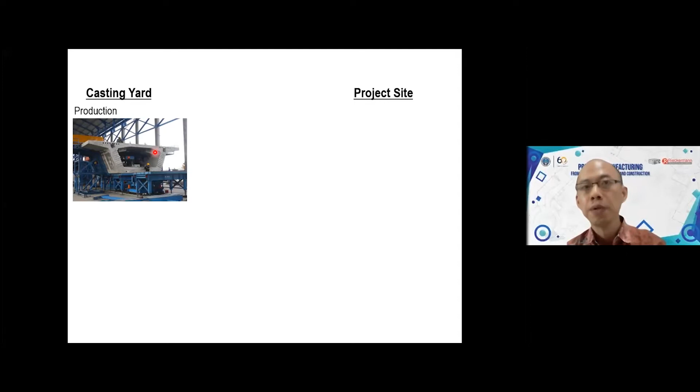So while on site, they are doing the foundation work, the substructure work, like piers, abutments, all these things, we can start doing the production of the segment. That's how we can speed up the whole process.

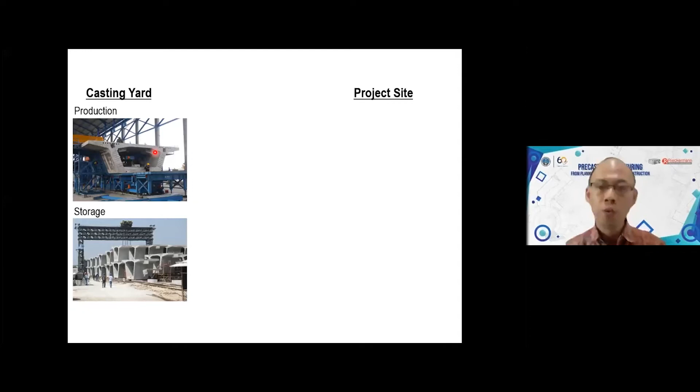If, for example, the site is not ready yet, in the casting yard itself we can do the storage while waiting for the sites to be ready—all the foundation or the piers, something like that. Once the sites are ready, we need to deliver the segment to the site. And then on site, basically, we do the erection, meaning we lift the segment and then do the installation on site.

So when we're talking about the construction work, we're doing something like this: from the office, when we do the design, then the casting yard, and then we deliver to the project site.

But when we are doing the planning, we must start from the project site backwards, meaning that to do proper planning—for example, as a design engineer or planning engineer—we have to really understand what is going on site, so that we can plan properly, because different installation methods, different erection methods, will make the design and planning completely different. That's why we have to really understand what is going on.

So the way I do my presentation now is that I will start from what's going on site, and then work backwards to the casting yard, because that's how we should plan our work. And in terms of site installation, or site construction method, there are a few methods that we can choose.

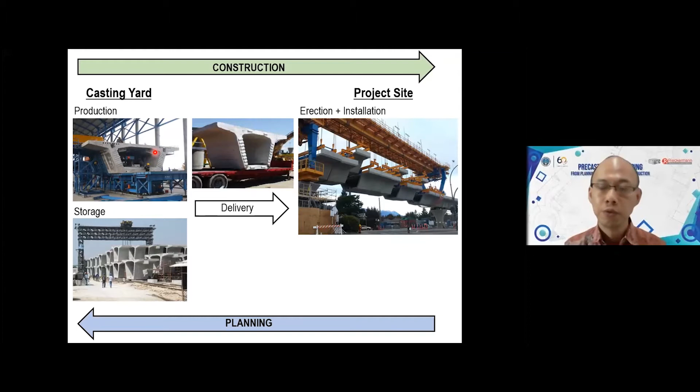Basically, these are some of the advantages, meaning why we prefer to do precast segmental: the casting we can perform at the casting yard, at the plant, compared to doing cast-in-situ on site, which is very difficult. If we are doing it in the casting yard, it will be better—we can perform our quality control much better. All the surfacing, finishing, texturing, sandblasting, painting, all these things, we can do at ground level. That's why we can control the quality better compared to doing it on site.

We save cost by reusing the precasting formwork, because instead of doing the full span, we do segmental construction. The segments can be precast during the substructure works, meaning these are overlapping activities, with relatively easier quality control prior to the placement of the superstructure.

Then assembly on site, the installation will be much faster. It's like playing with Lego - we put all these pieces, all these segments, erect them on site, and just join them together. It's much faster than if we had to do cast in situ, because we don't need time for curing before proceeding to the next span, since we're talking about horizontal structures.

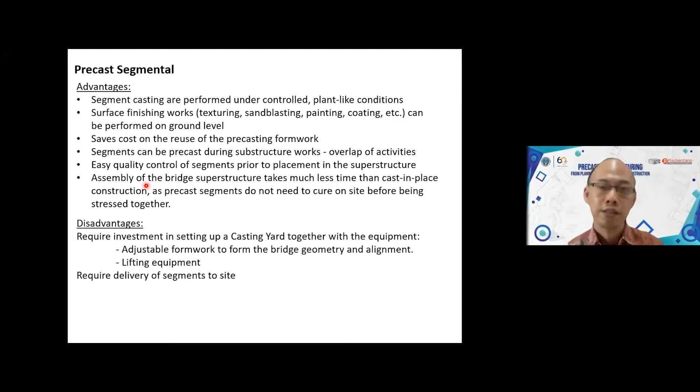The disadvantage is that we need a bit more investment in terms of the casting yard, where there are many equipments. Later I'll show what we have in the casting yard, like adjustable formwork and lifting equipment. We also have to deliver the segments from the casting yard to the site, which may not be possible in some areas. This is something we really need to plan properly.

In terms of the construction method, this is some of what I'm going to discuss today. Actually there are many methods using precast, but these are the 5 most common methods for precast beams. I will try to run through them one by one.

The first one is the full span precast beam. This is very common - basically we use a precast, pre-stressed beam, and then deliver it on site. We just put them one by one like this, and then do the cast in situ concrete slab. This is very common, but of course the length of the beam is very limited - we cannot do this for longer spans.

There are some variations. For example, the beam is precast and the slab is cast in situ, or we can also have a precast beam and the slab itself is prefab, also precast, and then we do some joints on site, something like this. It also can be done. The diaphragm can also be precast, or some can also be cast in situ.

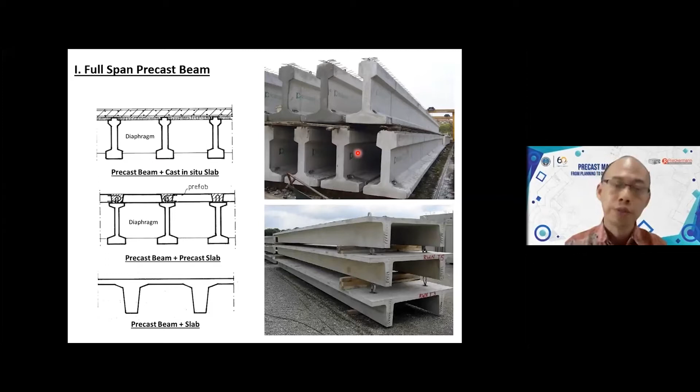This is something interesting happening in my hometown in Surabaya - we have this Suramadu Bridge. In one section, the causeway section, we have this precast beam girder. The weight is almost 80 tons, but the length is 40 meters. The problem is that the casting yard is somewhere here and the bridge is here, so it would be completely impossible for us to deliver this 40-meter long beam through the city area.

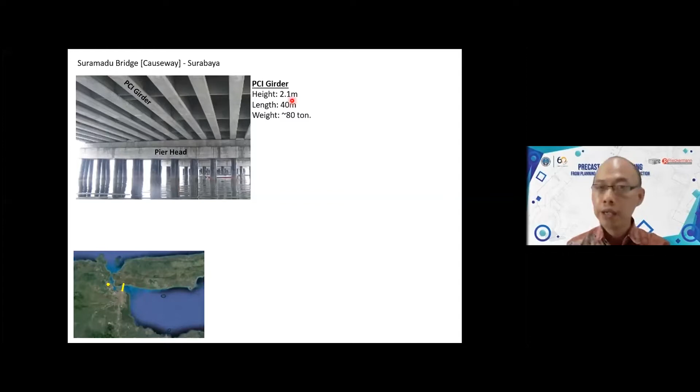It's definitely impossible, so this is why the planning is very, very critical. Because they cannot deliver this 40-meter length of beam, they cut the beams into segments - into 7 segments, each about 6 meters long. Then they delivered them from the casting yard to the site, so it became possible, and on site they're joined together using post-tensioning.

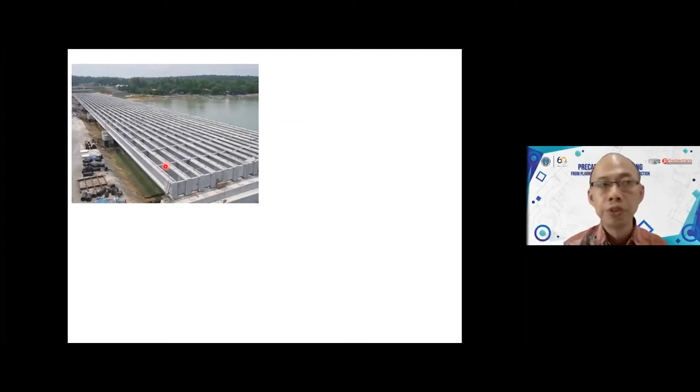After doing the post-tensioning, they lift the beams using a crane and install it. So this is how they do it - they cut into segments, then do it one by one, and put in the diaphragm, which is also precast. This is how they do the lifting. I'll show some of the video.

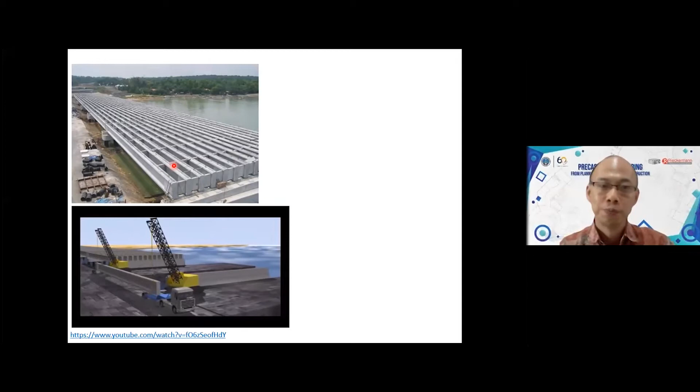This is one of the methods, because when doing precast we have to think about and plan how to erect and install it. One way we can do this is using 2 cranes, which have to move synchronously, doing it one by one like this.

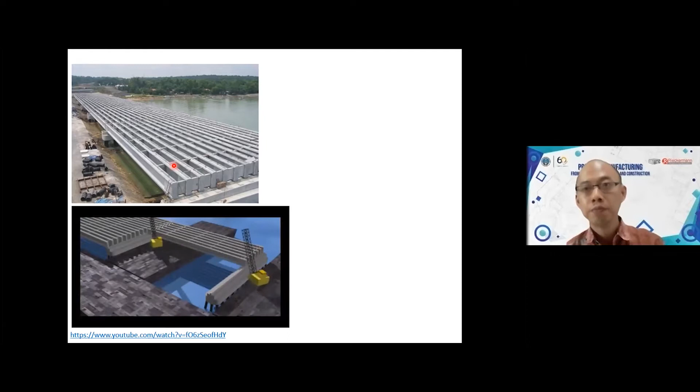Then the next for the next beam, and the diaphragm itself also. So this is the one near the land area, but for the one further away, this is how they do it.

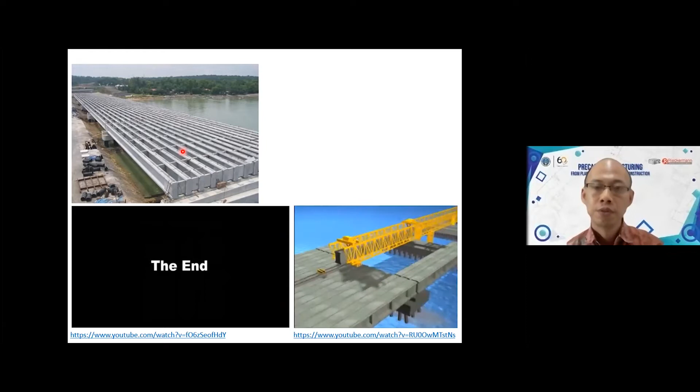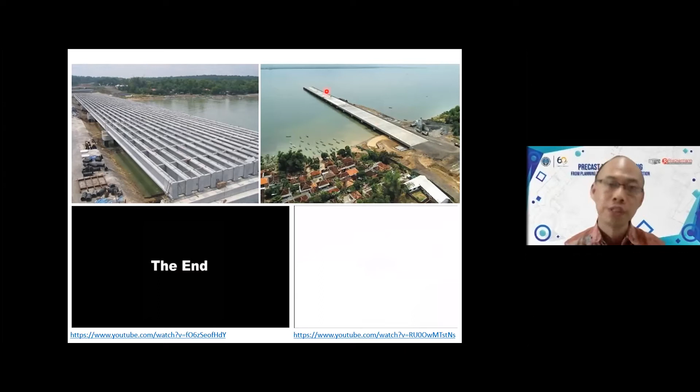So they just use rail, and then they slide it, and there is some frame structure to catch and put it in place. This is actually the fun part about precast - we have to find the most creative method to do the erection and the installation on site. Once everything is settled, they just do the complete cast in situ of the slab. So that's very straightforward.

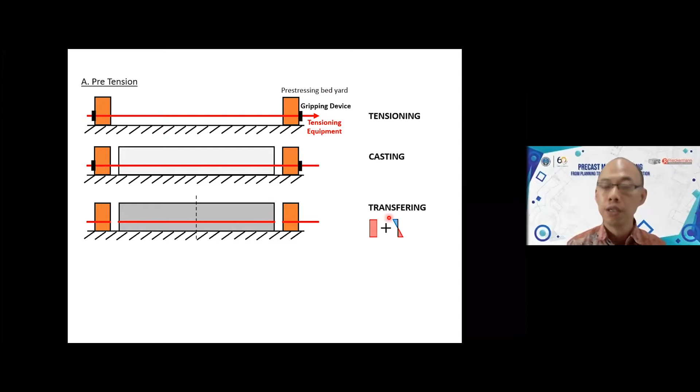For the beam itself, if we have to do the planning, we actually have 2 types. One is pre-tension, meaning we do the pre-stretching first, then the casting, and after that we do the transfer. Once we do the transfer, there is compression and then the counter bending moment - compression and tension, something like this.

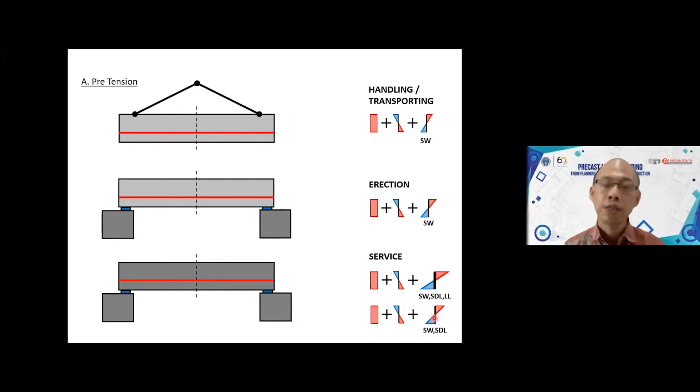When we do the handling or erection, we have to be careful of the additional self weight bending moment, depending on which point of the lifting. This is during the erection, and this is during service - meaning during daytime there is full live load, and during nighttime there is no live load, only the superimposed or permanent sustained load. So all these things we have to plan properly, meaning in all stages the stresses must be within the limit.

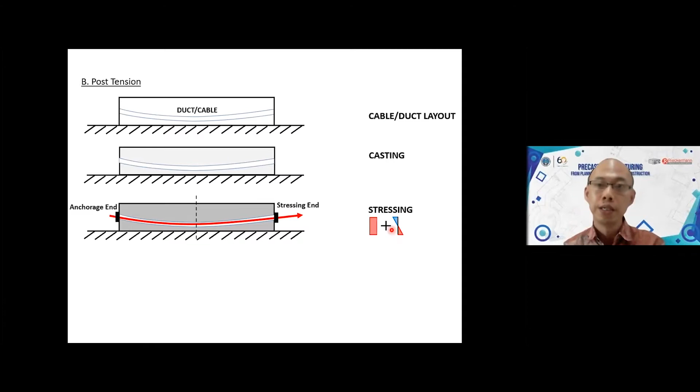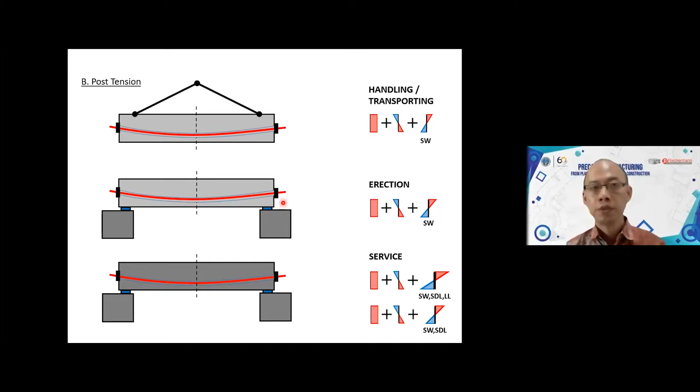Then we do the grouting. Again we do the lifting - depending on the lifting point, there will be additional stresses due to the self weight. Then during the erection, again the point might be different from the lifting point, the bearing location. And then during service, something like that. This is the typical post-tension beam - this is the rebar, then after they do the concreting, they do the stressing.

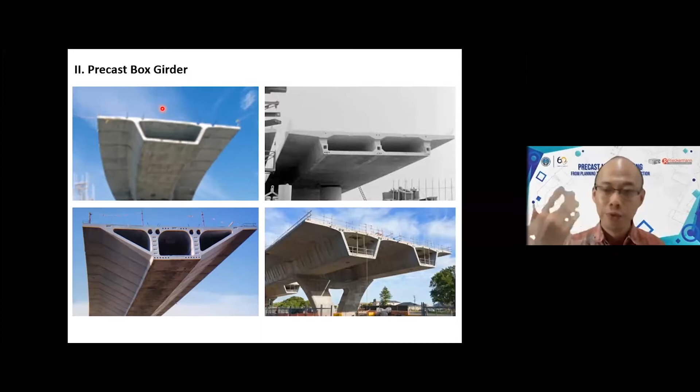So we do the beam and slab together, something like that, in one lift. But the thing is, for the precast box girder, if we are doing the full span, it will be very heavy because they have to lift everything together. That's why the span is very limited.

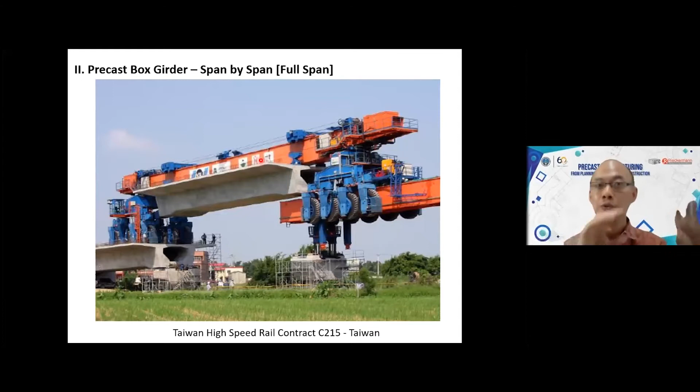This is happening in Jakarta just recently, I think last week. They are doing the full span box girder.

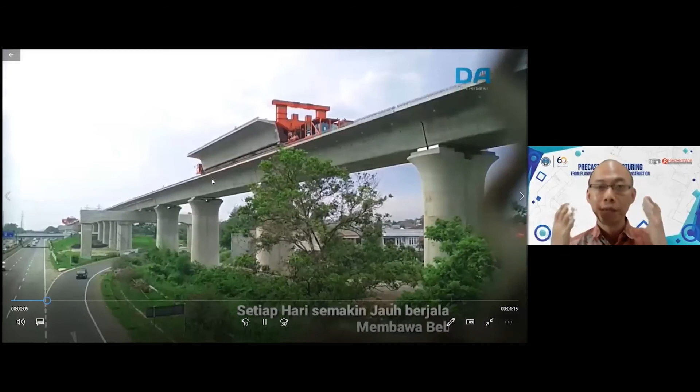So they're carrying, this is something we have to plan properly, how to carry all these things. So they have this transporter, and then this has the launcher here. And this launcher, this big giant equipment, must catch the segment and then slowly lower it down.

This happened just recently, I think last week. This is Jakarta Bandung, the new railway viaduct. And then they have to do the bearing pad here, for the proper installation, and then they're just lowering it down again.

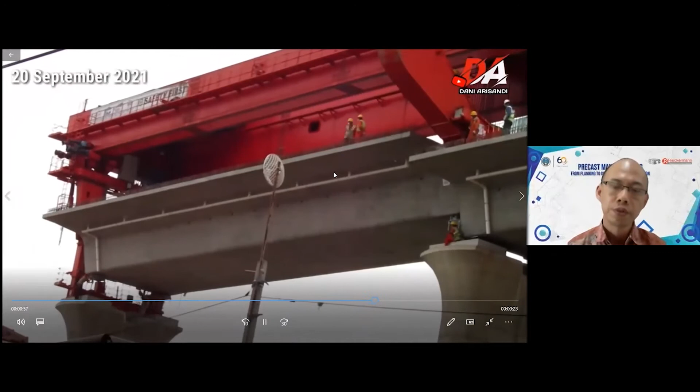It is very, very fast. But again, the investment is huge because they have to invest in the equipment. And then the casting yard must follow. The design also must follow if they choose to use this kind of construction method.

Some people, rather than doing this full span, think, okay, what if we can do it segment by segment so that it's easier to do on site? So they start to think about this segmental construction. And again, depending on site, one of the possible methods is using the false work.

If we can have the access, which is very luxurious in bridge construction, most of the time we do not have this luxury of having access down here. But if we can put the false work here, it will be good, so that we can put the false work, and then we can lift using crane and put the segments one by one, and then they join together.

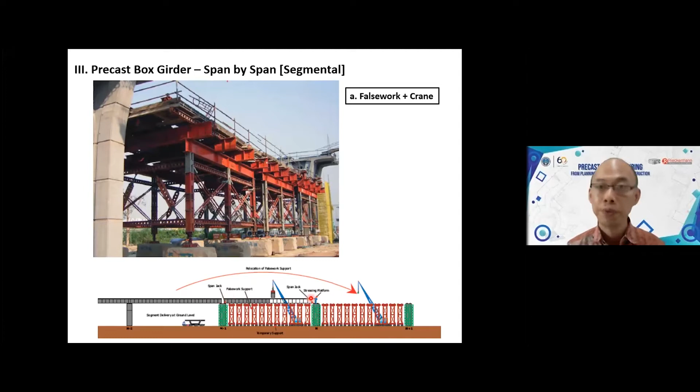Another method is that we can use this launching gantry. This happens if we cannot have access here, meaning we cannot install the false work. We can only send the segment, either delivered from the bottom or from the top. This is the launching gantry.

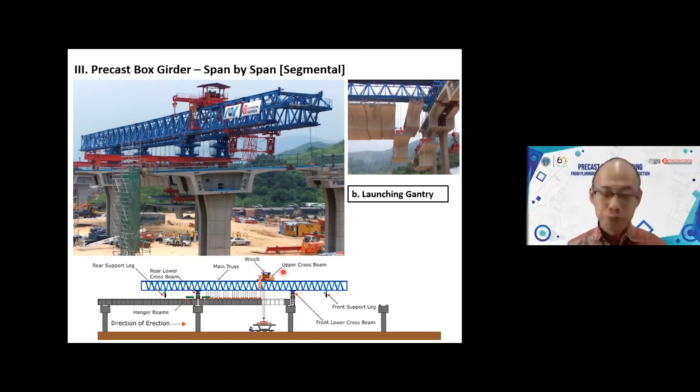This is very fast. This operation is very fast compared to if we do cast in situ. This is much faster. But again, the planning itself must be very precise because we are doing some precasting, and the schedule is very fast here.

So this is how it looks. They are lifting all the beams, all the segments, while people can still be moving around underneath, and then they will do the joining together one by one. Okay, this is how it looks.

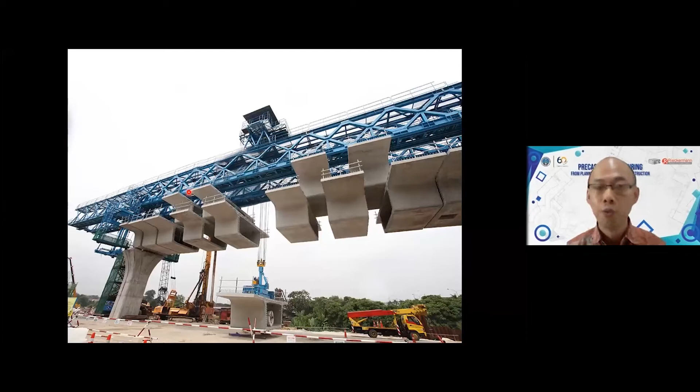And usually some of the segments will be lifted a little bit higher. That's a reason for that. I will show the reason why they do something like this. Okay, I will move to the next video.

Then they hang this segment to this tie bar. And by the way, this segment is about 30 or 40 tons. Yeah, it's very heavy. And they continue something like this.

This is one of the common practices, meaning they lift all together and then they join one by one. This is a very common method, although there are some variations that can be done.

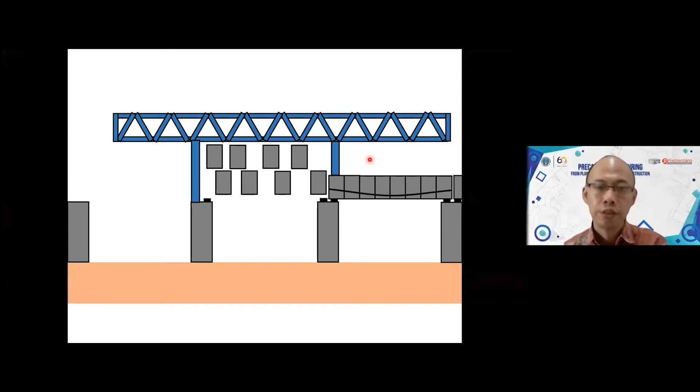Okay, this is some animation. I try to do the simulation. So all this segment is hanged on the launching gantry here. So what they are doing is actually lowering it down and then installing it here, they join, and then this one they also join. They're doing it one by one. Yeah, something like this.

The reason why they have to do it up and down is because if we are doing all of it at the same level, there is no space due to the installation.

So once they complete like this, they do the post tensioning, and because this is simply supported, it's easy - it's only the positive bending moment, and they can do the post tensioning. Definitely post tensioning, there is no way we do the pre-tension here.

Then they lower down and do the adjustment on the alignment, because some of the bridge may be straight, some may have a gradient, or if the bridge has a radius, there will be a slight crossfall, and they do the adjustment from the bearing, the alignment, something like this.

Another method that can be done is something like this. Show the video.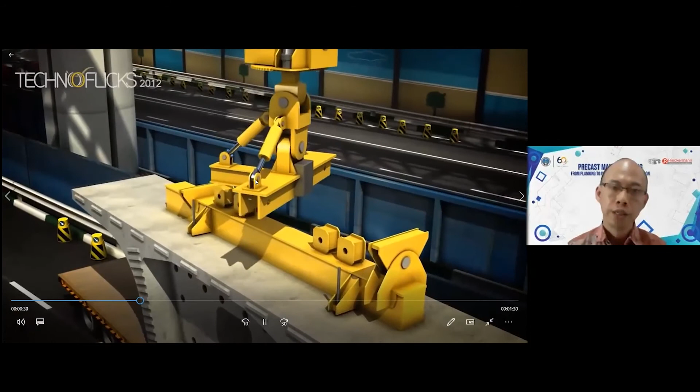So they catch this segment here, and then they lift, and then they hang it to the tie bar. Once they hang to the tie bar, this can be released to catch another segment.

Here they install one by one - they lift, they install, they lift, they install. It also can be done this way. Then this is the last segment.

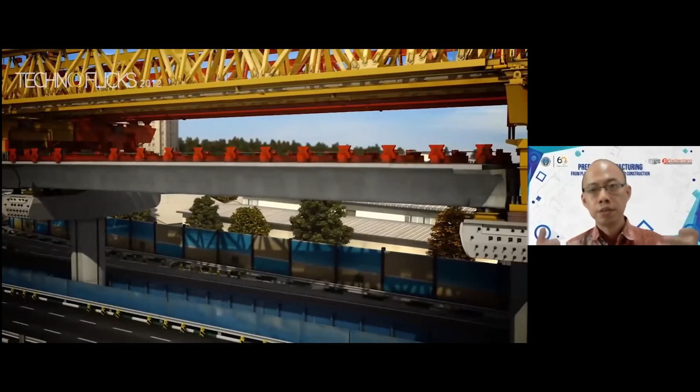Do the adjustment, the alignment. Then they do the post tensioning. So this is how the post tensioning looks like inside the box.

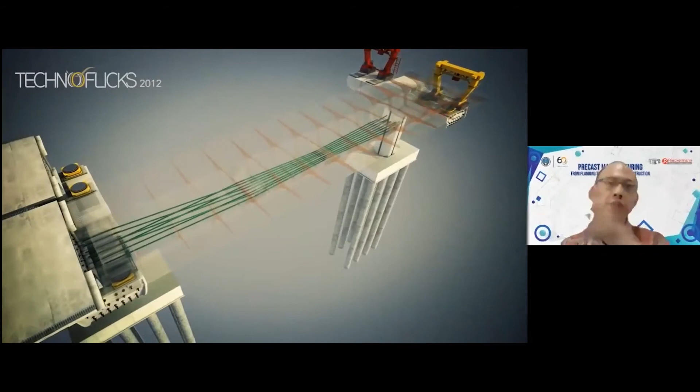And they do the jointing of the duct, the tendon. And then they move to the next segment, to the next span. No, sorry, stressing first.

Yeah, this is how they do the stressing. Yeah, that's the thing.

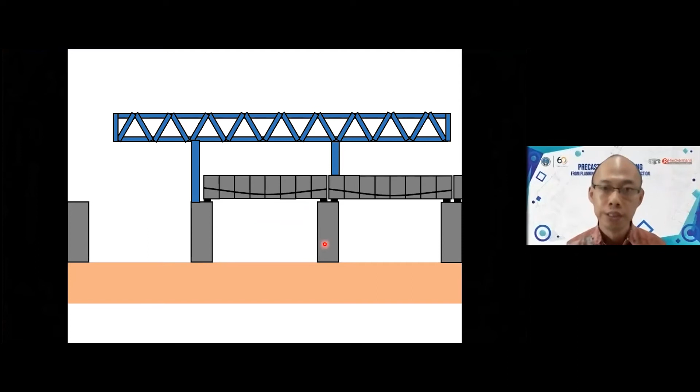Okay, now we're talking about the joining. How are we supposed to do the joining? Okay, in the casting yard, the tendon looks like this - because it's only a positive bending moment, definitely the tendon will be here, mostly at the bottom.

Okay, and they do this - this is so-called the shear key. So on side it will look something like this. I draw it a little bit exaggerated. So this is actually the shear key, and one side we call it the male shear key, and this is the female shear key - that's how site people call it. And it has to match perfectly.

Okay, what they are doing on site, first they are applying the grout. They're applying the grout, and then they join together. Hopefully it matches, hopefully it matches.

Yeah, imagine if you're doing something up already on the top, and then it doesn't match, it will be a disaster. So that's why the planning must be very, very perfect, very, very accurate.

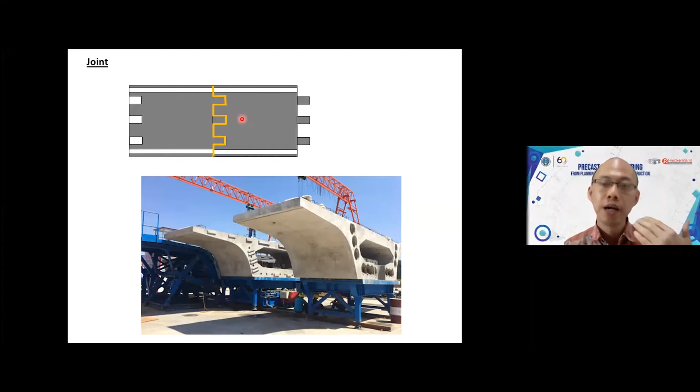So once they join like this, okay, they join so many segments, and then ultimately they are doing the post-tensioning. So once they do the post-tensioning, it applies a compression force so that it can be joined together. So the joint actually uses the shear key, the grout, and the post-tensioning.

There is actually no longitudinal rebar between the segments. So the rebar only stops between segments - there is no continuity in between the segments. The continuity only comes from the post-tensioning.

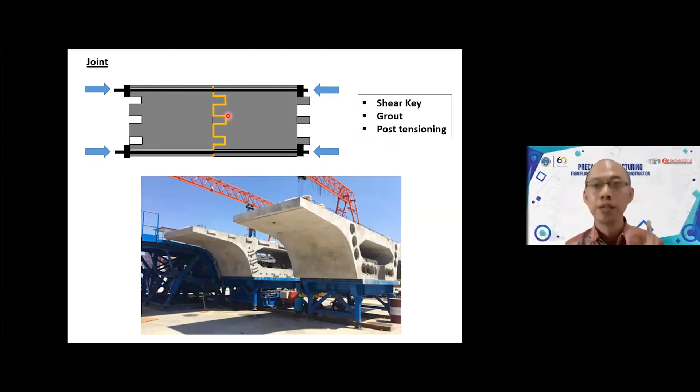So this is how they do it on site. And how do they make sure of 100% match is that they are using the so-called match cast. So this is how we do the planning - in the casting yard, they have to do this so-called match cast. So after they cast the first segment, they are using the first segment as a match, to match the other one, to match the next segment.

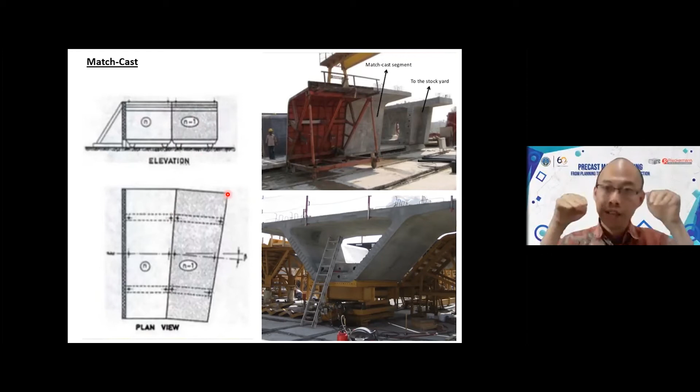So if we are doing match casting in the casting yard, on site it will be 100% match between the male and the female, something like that. Even if there is a radius, we can also do the match cast, something like that. Also, if there is a gradient, we can also do everything here in the casting yard.

And because we know that this will be lifted using a crane or using a launching gantry, in the casting yard they have to put the inserts so that on site they can catch and lift it. Imagine if there is nothing here, then there is no way on site they can lift it out. So everything must be planned properly depending on what is the situation on site.

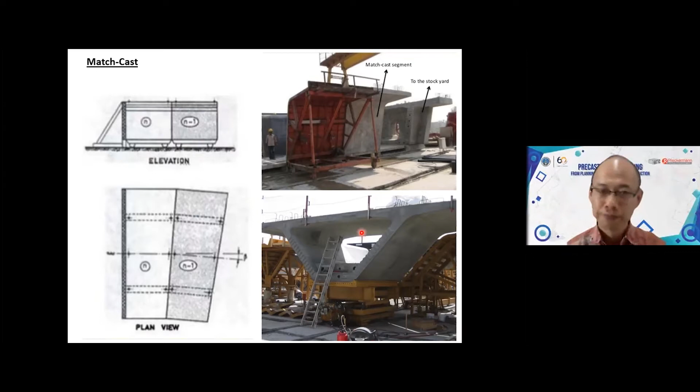Then we move backward to the casting yard and then move backward to the design when people do the design. So this is how the match cast thing works. I will show some video about what's happening in the casting yard and how they can do the match cast.

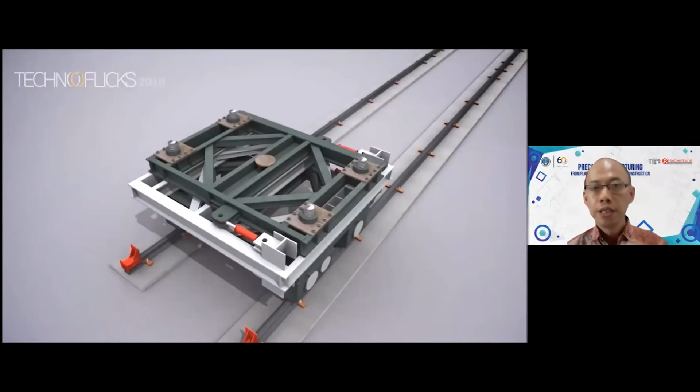So this is the adjustable formwork. It has to be very flexible because the type of the segments can be anything - the dimension, the thickness, and if there is a radius or whatsoever.

So this is the matching segment, and this is the formwork. It has to be flexible, meaning that it can do some adjustment. There is a hydraulic jack that can shift the angle of this thing. And this is for the end segment.

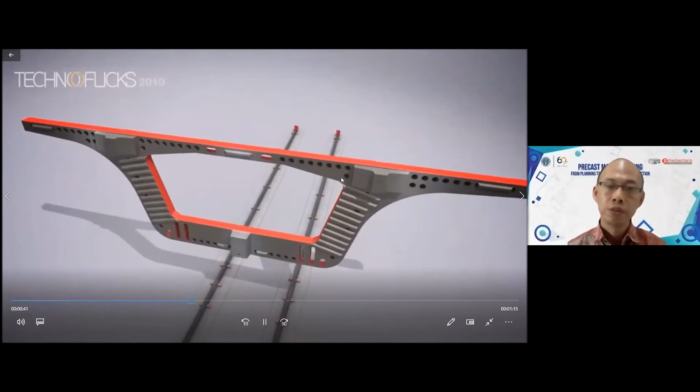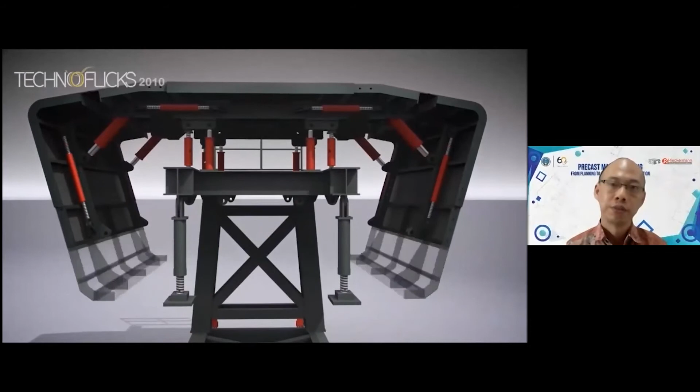And this is the inner form. So we have the outer form and we have the inner form, which again is adjustable. Again, this is also an investment.

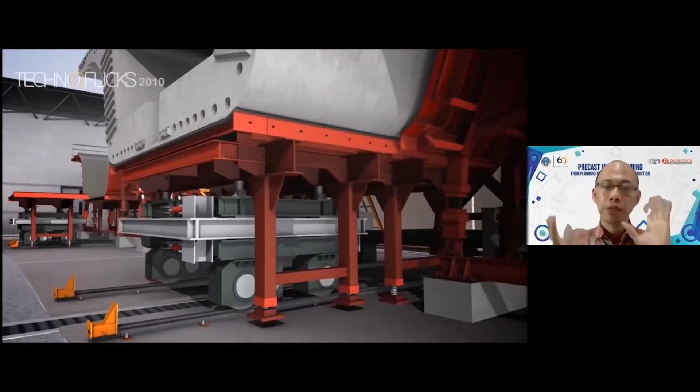So this is the match cast. They put the rebar and then they do the casting. They release the formwork - and this is how they release the formwork. Everything is done by hydraulic jacks. Then they lift, then they put it in storage, waiting for the site to be ready.

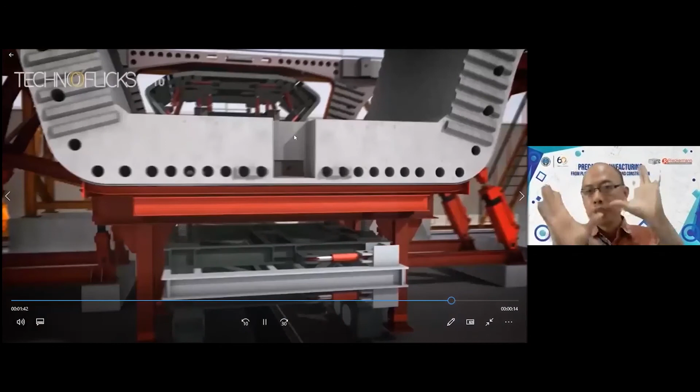See, there's a shear key, this thing. Okay, they do some adjustment in the alignment. Then the rebar cage just arrived. Make sure all the dimensions, the alignment of this thing, is correct. Then they can do the casting.

This is very important, especially the post-tensioning duct, because later on they will have to do the post-tensioning. So the duct itself must be matched. So this is how the casting yard looks like.

Okay, then I think I have one more video. So this is what's happening on site. So this is the inner form, and then this is the ducting for the post tensioning, and this is the match cast, the previous segment.

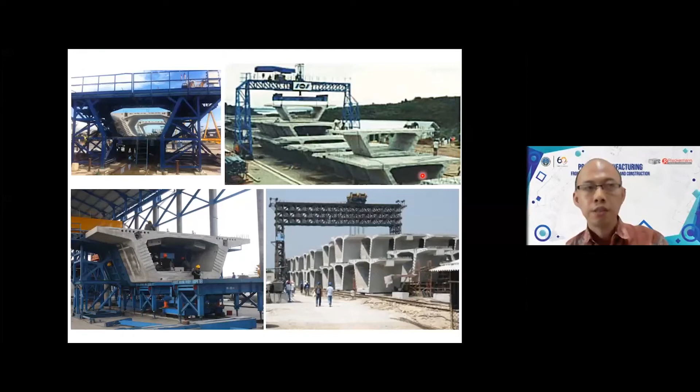And because this is a precast, anything wrong in the casting yard, it's very difficult to do rectification work on site. It's very difficult. That's why the planning itself must be very, very accurate.

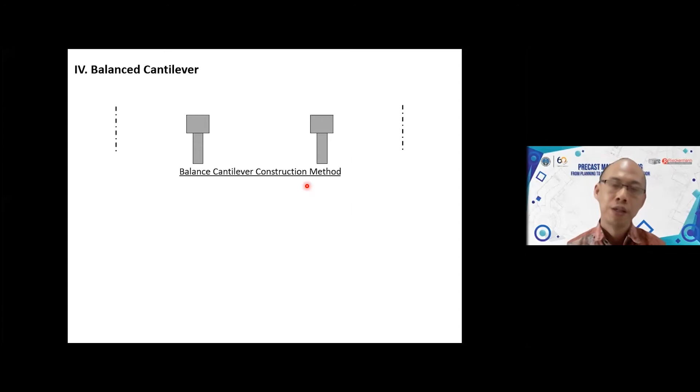Okay, another method is using the balance cantilever. Again, if we are talking about the construction sequence, definitely we start from the foundation, the pier, and then the pier head. So this is actually what we have on site. So if we want to do the segment, we have to start from here actually. That's why they invent this method called the balance cantilever.

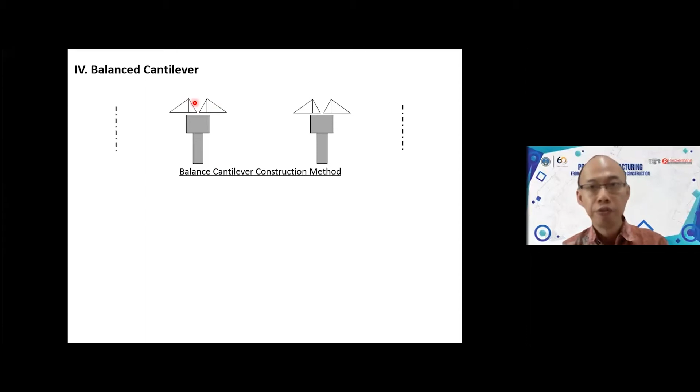What's happening is something like this. They put something here - it can be a lifting frame, it can be just a crane whatsoever. Meaning that they put the first segments here and then they join. What's happening here is that they will induce a bending moment, a negative bending moment.

And because there's a negative bending moment here, we put the post tensioning on the top fiber. Then this thing going out again. Install the next segment, the bending moment increases. Then we put another tendon on top to carry this bending moment, and so on. It keeps increasing.

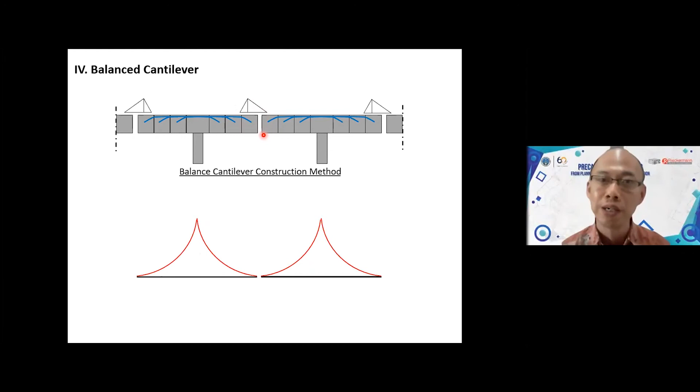And then at the end, definitely at the very last end, we have to do a cast in situ, the closure pour, because there is no way we can do all by precast. To match this perfectly by precast, there's no way. So the last segment will be a closure pour using the cast in situ.

Once it's joined, all the bending moment becomes different. Now it becomes a continuous structure. Then after this, all the live load comes, and it will increase the positive bending moment because all the live load later on will come. But during the construction, this is the critical point. That's why later on when we do the design, we have to be careful of this negative bending moment.

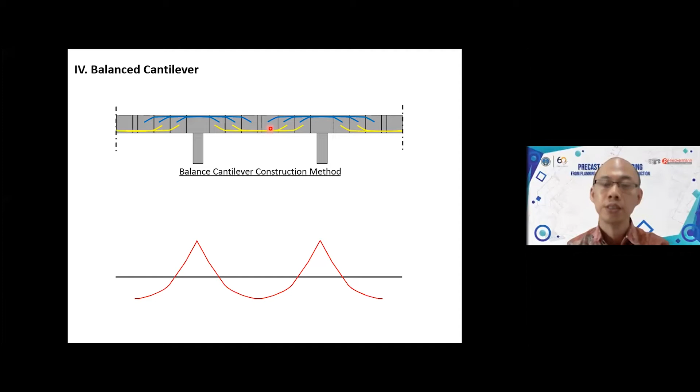Although once it's connected, it will be slightly less - that's why we need the continuity tendon at the bottom, something like this. So this is the cantilever tendon, and this is the continuity tendon. Cantilever tendon at the top to carry the cantilever weight, and this is to carry the live load at the final stage.

So this balance cantilever is actually building the bridge from both sides, and we have to balance - maximum only one segment difference, cannot be different so much, because the overturning bending moment will be huge at the pier and then transfer to the foundation. Advantage: no false work required.

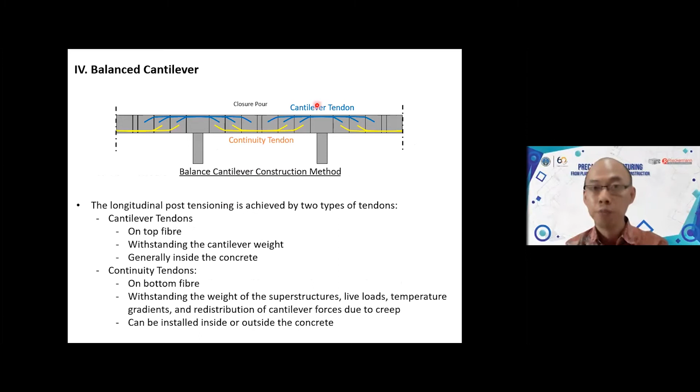These are the areas that are free because we are doing everything on the top, from the top. It's feasible when the terrain underneath us is inaccessible - traffic, rivers, even cliffs or high above the ground. Optimization of the formwork, improved, very flexible.

This is how we put it on site, and that's why we need to know the construction method. Because the tendon layout will be different. If we choose to have a balance cantilever, most of the tendon will be on the top. But if we are doing span by span, most of the tendon will be at the bottom because of positive bending moment, and this is because of the negative bending moment.

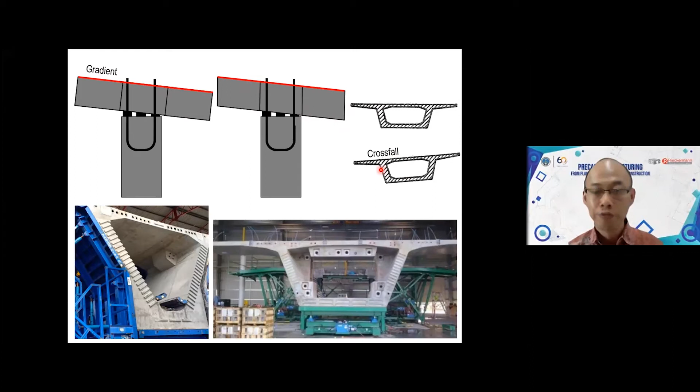Either way, we have to do proper planning. Both ways are possible and feasible, even if there is a gradient like this, or even if there is a crossfall. It can be done perfectly if we know what's going on site and if we know how to plan it properly.

This is to show some of the projects I've been involved in. Yeah, this is the one in Hong Kong.

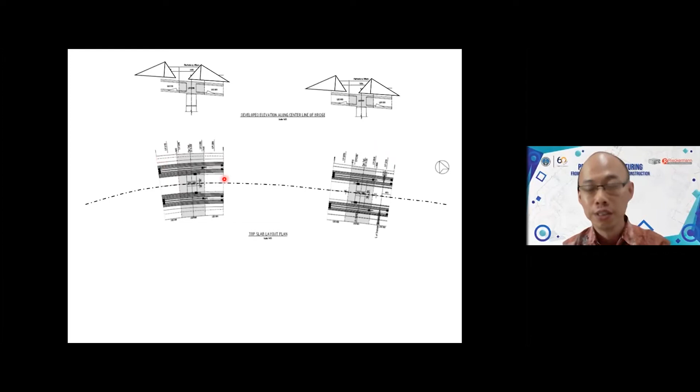This is just to show that we have to do the balance cantilever. We stress the top cantilever tendon and then we shift, something like this. So after we finish the top, then we do the closure pour. Then all the equipment is released back. Then we do the bottom tendon. This is what we were doing in Hong Kong the last time.

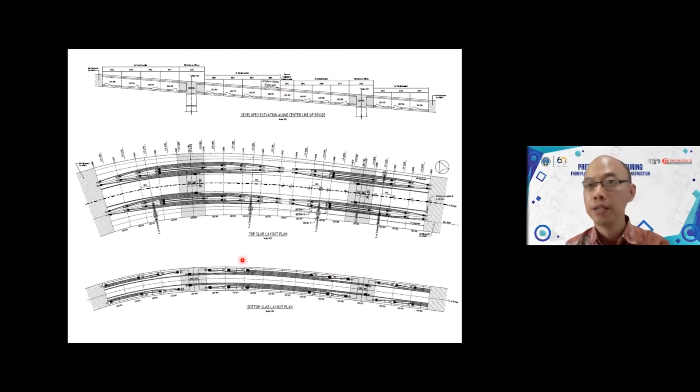This is also very important to be considered. For example, if we are doing it without camber, on site due to the cantilever and then due to the self weight, it will go down something like this. That's why when we do the planning, we have to aim slightly up so that on site it will be just nice. Everything can be done properly, everything can be calculated, and everything can be planned.

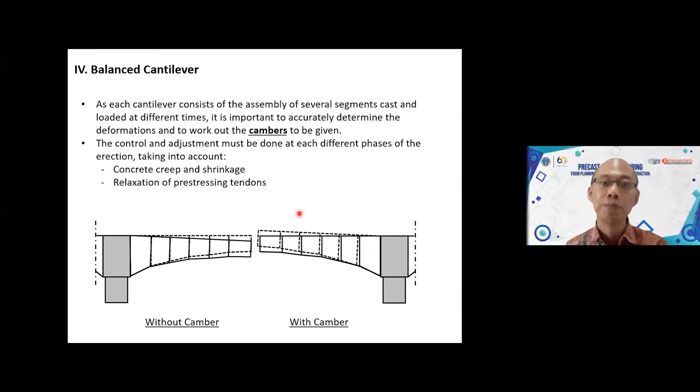Because if you're talking about a 200-meter span, for example, and then we go 4 meter, 4 meter, 4 meter, then there is a chance that we do not meet at the center, and it will be very dangerous. Although things can be done, we can do some rectification work, but it will be difficult. So pre-camber is very important, although if you are doing precast, it will not be as much compared to if we're doing cast in situ.

Because it's a balance cantilever, we can do the adjustment of the segment. If you notice, this is thicker and it gets smaller and smaller. This can be done using precast or using cast in situ, where we do not have any access from here. We are doing everything from the top.

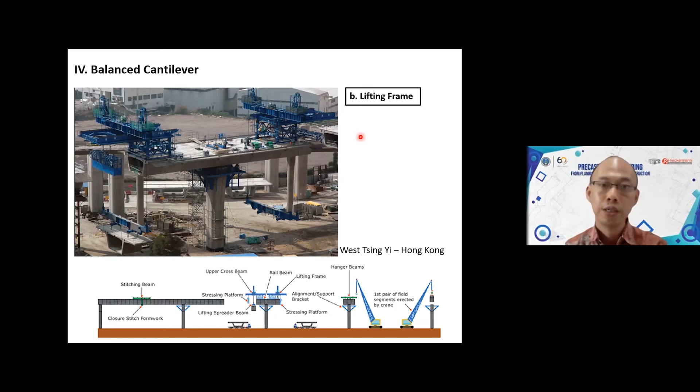It can be done using a crane, just lift using crane one by one. Very easy method, we can do the lifting frame. We need to put the lifting frame here, we lift, install, then this moves to the next segment. It can also be done using a launching gantry, yeah, we do the balance cantilever.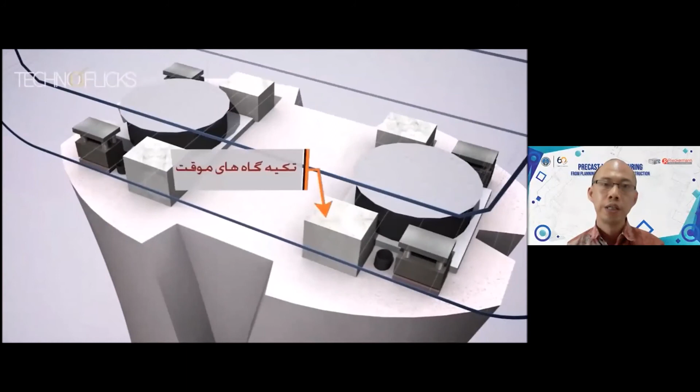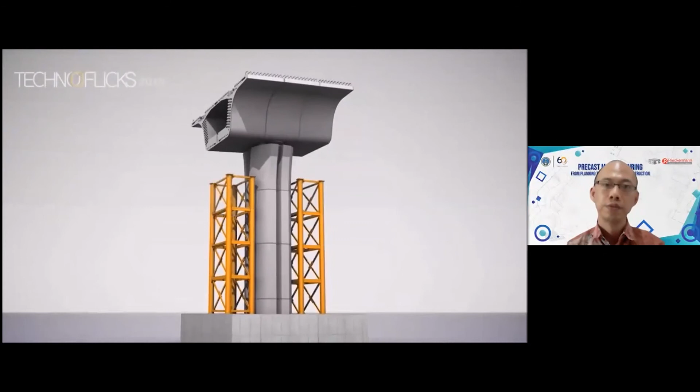This is the first segment. They put the temporary post tensioning, then they do the cantilever tendon and do the stressing. Then they move to the subsequent segments, and this is the very last segment. They do the adjustment, hopefully it matches. Then they do cast in situ only for the last segment to join it together. After that, they do the bottom post tensioning, something like that. So that's how we do the balance cantilever thing.

Another method, which is also very creative in my opinion, is this incremental launching. They're doing the casting on site, but I cannot say this is cast in situ because they're doing the casting yard here, and then after they finish, they just launch the whole thing. Then they cast the next segment here, pull it together again, and cast the next segment again, one by one, something like this. So this is the casting yard, and this is the site, and the delivery method is by pulling it together.

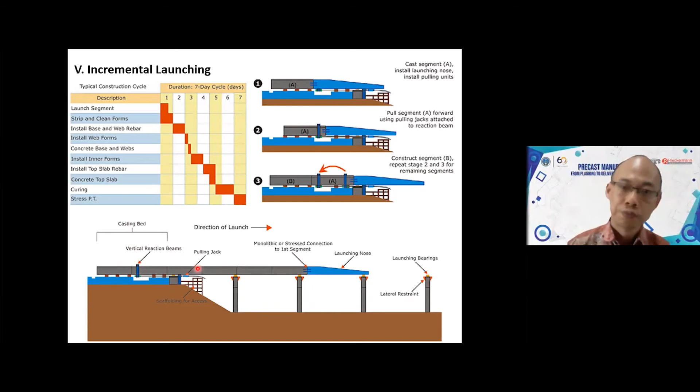So I can still say that this is precast. The casting yard is here, so that they just pull it together, something like this. So the casting yard is here, and when everything's ready, they just launch it, something like this.

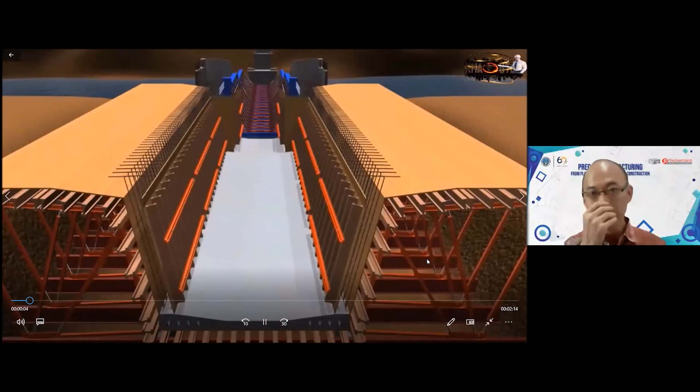I have one last video. I know my time is almost running out. This is a 2-minute video. This is the casting yard at the end of the bridge, also on site actually. So they put the rebar, they put all the tendon, all this thing.

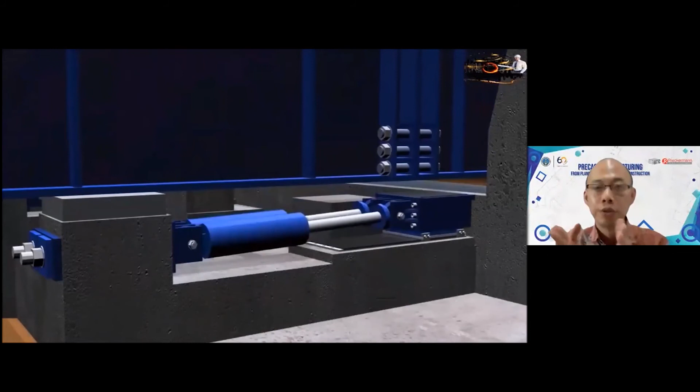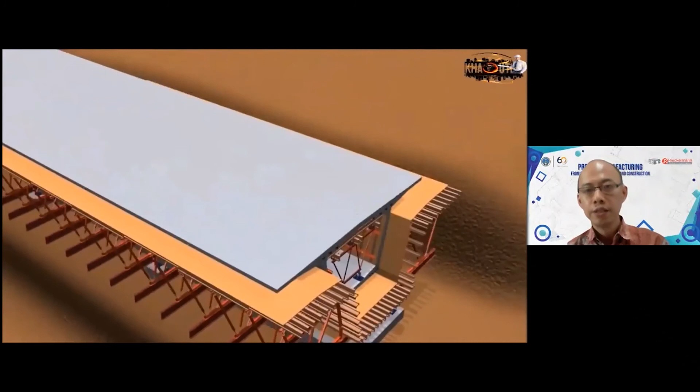And then there is some mechanism, again, using a hydraulic jack to pull this. This is how they pull the segment forward. And then they continue casting the next segment. And they keep on pulling until the end. And this is how they do it.

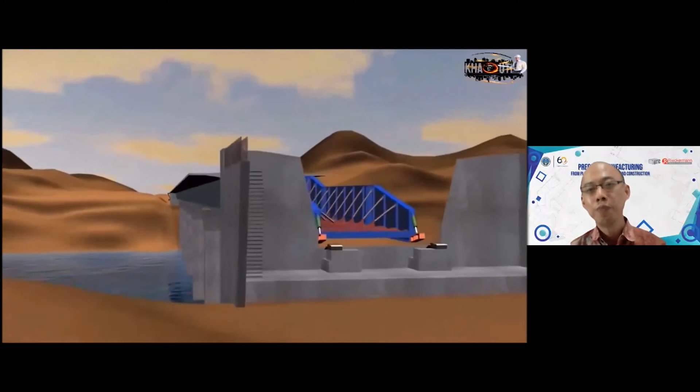They put some Teflon so that there's to minimize the friction, something like that. It's all done by hydraulic jack, all this thing, just to speed up all the process. It looks easy in the video, but on site it will be very, very tough and must be very, very precise.

In terms of the geometric control of this thing, once it reaches the site, then they do the final adjustment on the alignment, and then they put the bearing, because at this moment they are still sitting on the hydraulic jack. Then after they put the bearing, the work is finished, and they clear up all the casting yard.

And this is if we want to do the planning, the design, how we are designing the tendon, during the construction. Again, we have to know what's going on site. This one, I think I just skip. This is some of the project I've been involved, but I just skip it.

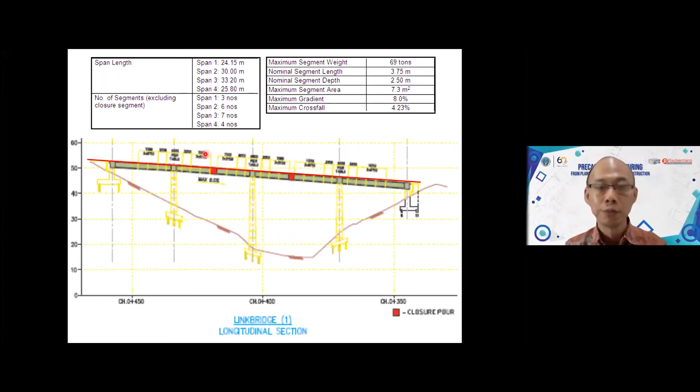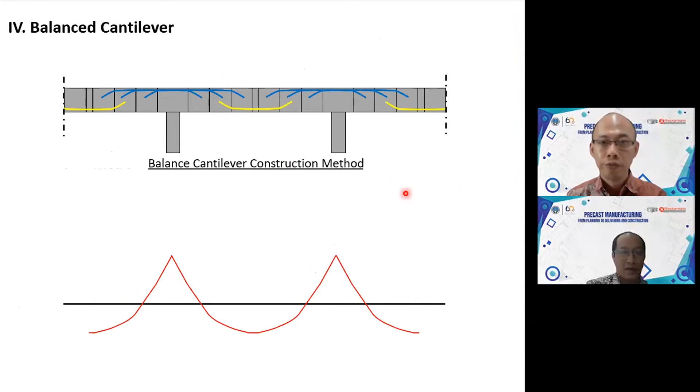So, for balance cantilever, usually we choose it if we do not have any access here. That's usually how we choose. But of course, there's another consideration: whether we have the equipment or not. There are many factors, but one of the most common reasons is that we do not have any access here. Although for span by span, it also comes from the launching gantry, there's also another huge investment.

So I'm not sure whether I answered it, because segmental can be done balance cantilever or span by span. It's the same, but in terms of design and planning it's completely different, especially how we arrange the tendon. So the balance cantilever is actually the method, and segmental is the section, not the method itself. Yes, that's right.

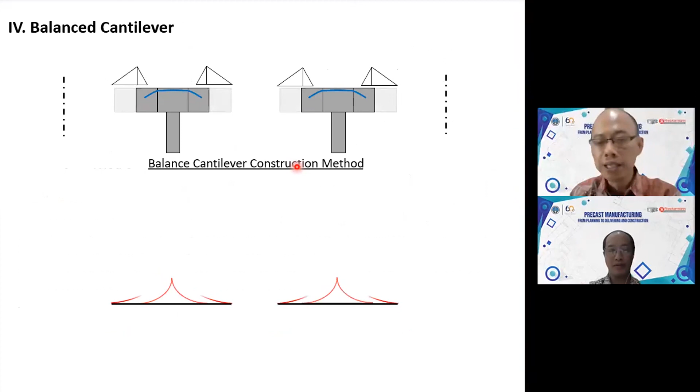This is very tricky actually. For example, after we do the first stressing, and then subsequently when we do the second stressing, the first tendon will suffer elastic shortening because of the second tendon. And then subsequently the second tendon will suffer one elastic shortening, while the first tendon will suffer two elastic shortenings - it's a cumulative effect.

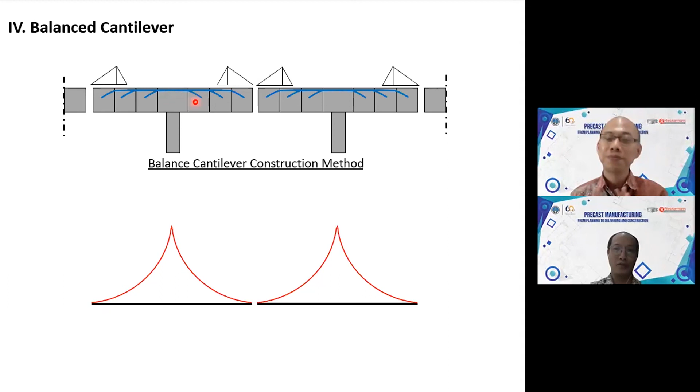So how do we calculate the losses? We actually have to do it stage by stage. That's why it's very important for us to understand what is going on site, so that we can calculate backwards the losses stage by stage. The cambering also we have to do stage by stage, because during construction the load is alive, right? Yes, that's why it's fun.